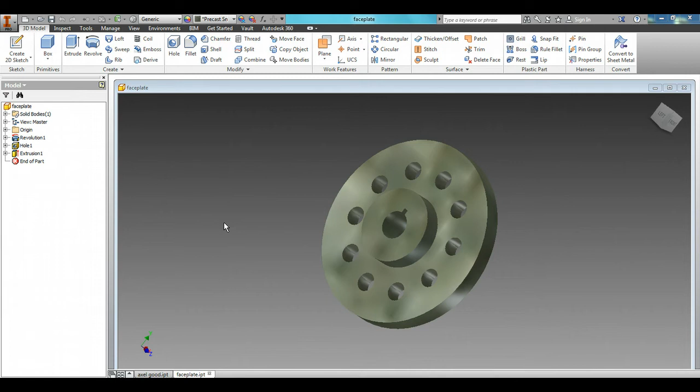We are going to be working a little bit on this faceplate. It uses a revolve feature, circular holes, and has a keyway right in there. Some of the geometry is a little bit complicated, so be prepared to stop this video and do it step by step along as I do it.

So let's get started with the actual part. New part, create 2D sketch, same thing that we've always been doing. We're going to start on the rotational geometry. We're just going to pop in a horizontal line that's 2 inches long, and change it to a construction line, so it goes dotted right there.

Construction line, so it really doesn't mean that it's there, it's just an imaginary line. Now from there we're going to click off construction. Turn that back to a construction line. We're going to draw another line, make it 1 inch long. Now we have to locate this line 0.375 inches away.

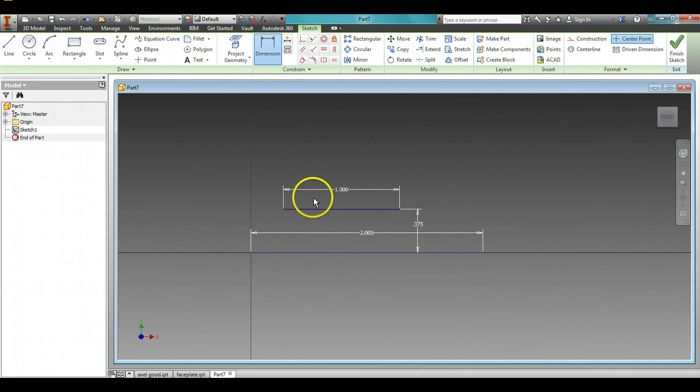So I'm going to click on dimension right there and change it to 0.375. So now we have two parallel lines, one is a construction, one is solid, 0.375 inches away.

Next, after this, we are going to coincident constraint. You can see how it latches on right there. I've got the dotted line coming down. We are going to draw a 1 inch vertical line from there and a 1/2 inch horizontal line from there. Delete that dimension.

And now we trim that part right there, so we have this up and over. Now from here, we need to draw a 2.5 inch line straight up. Same thing, see how it goes dotted there? Click on the horizontal, and we are going to go 2.5 straight up.

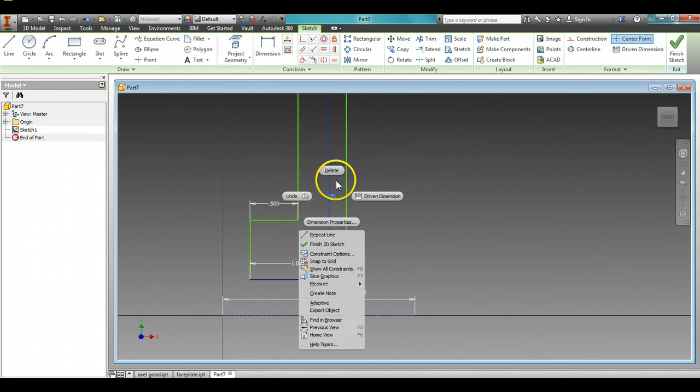1/2 inch out, 0.5. Connect those two. Delete this dimension, now we'll be able to trim that part.

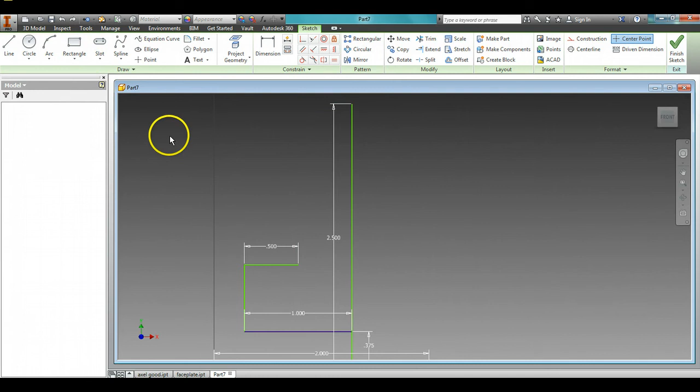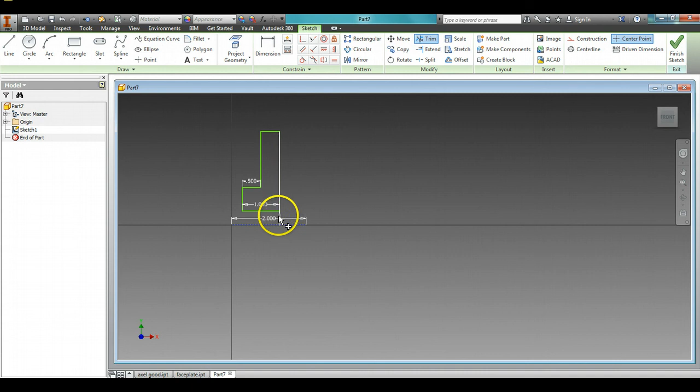Let's try that again. Straight line, 2.5, 0.5 horizontal, close that right there. Delete the dimension. Delete that. There we go, we got it trimmed.

So now that we have our actual pattern, 0.375 inches away from right there, we had to play with it a little bit to delete the dimensions so that we could actually do some trimming. We are going to finish this sketch and revolve it. Click on revolve, that's our face, that's our axis, and now we have a circular pattern.

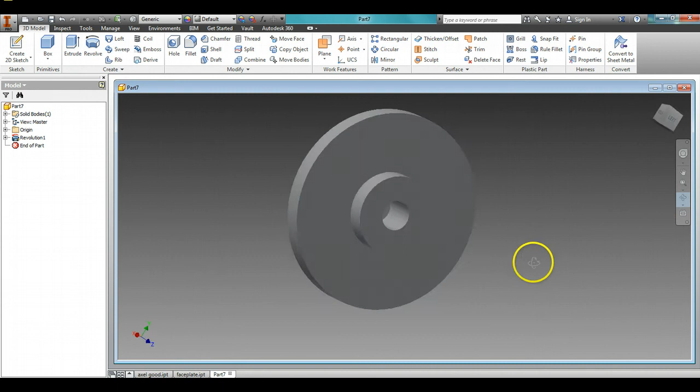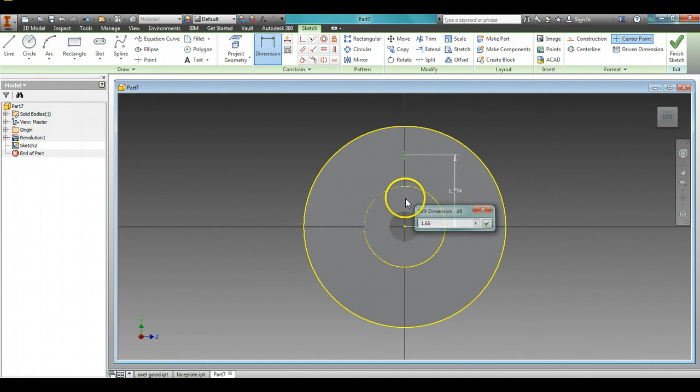From here, we have to create a 2D sketch on that face. We are going to put a point in, and that point has to be 1.65 inches away, so we are going to dimension that to the center and change it to 1.65. Click on our circular tool, click on our axis, right there, geometry, and we're going to change that to 10. Right there, so we got 10 points, ready to go.

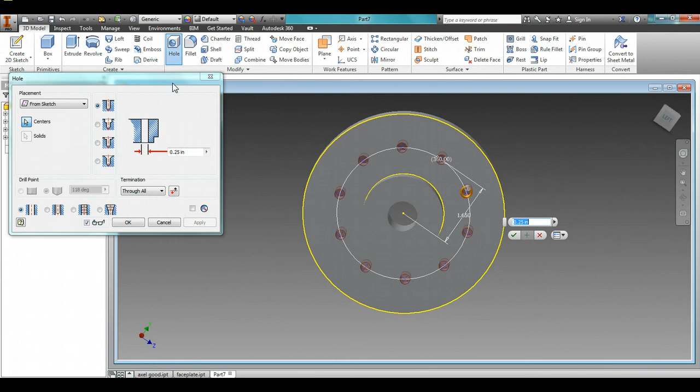Finish sketch, hole, and we are going to change this to 0.5 inches, so they're half-inch holes right there. And the part is pretty well done now.

Now we've got to create a 2D sketch for the keyway, which is going to be on that piece here. We're going to zoom in really close so we can see it. Make a line that is 0.125 tall right there. Horizontal line 0.125 divided by 2, which is going to be half of an eighth of an inch, then you're going to go straight down and see how it intersects that circle right there.

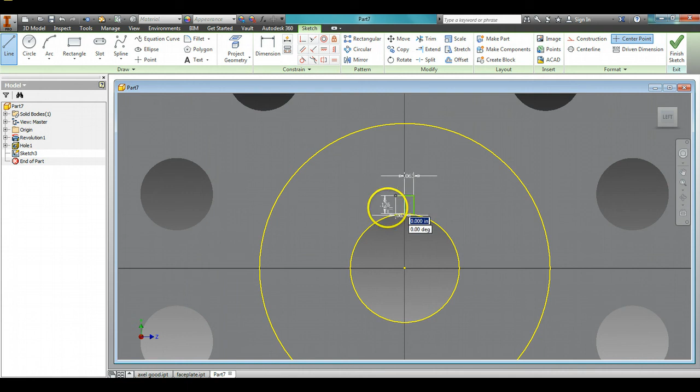Going to do the same thing on the other side. Start from the midpoint, 0.125 divided by 2, and then go down there until it intersects the circle. So you can see all that we've really done is draw a square that intersects the circle.

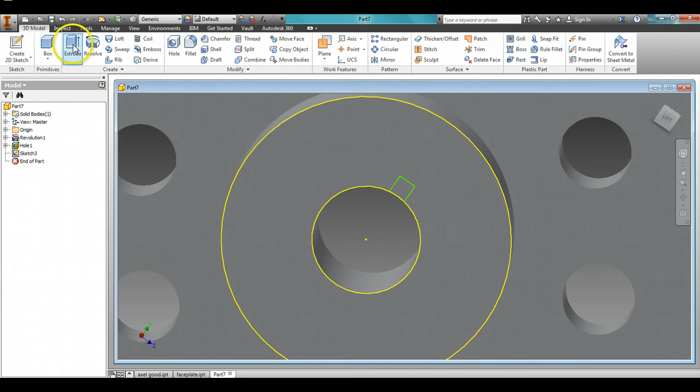Delete the dimensions, that way we can do some trimming. Trim this middle portion out and finish the sketch. Now we can actually extrude this on out. Select that portion, instead of coming out at us, we're going to click Cut so that it goes in, distance 1 inch, and we have our keyway actually cut in there.

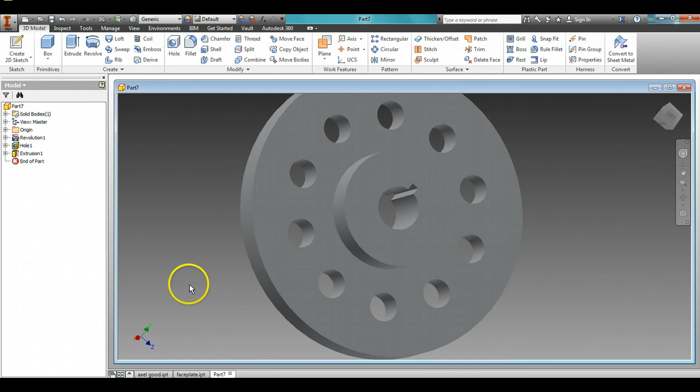So revolve it or rotate it. Make sure you've got your project geometry actually correct, keyway's in there correct, and then it looks good. Save it to faceplate and export as a PDF so you can turn it in. So stop this video, rewind, and replay as many times as you need in order to get your geometry correct, get it revolved, and get the keyway cut in.